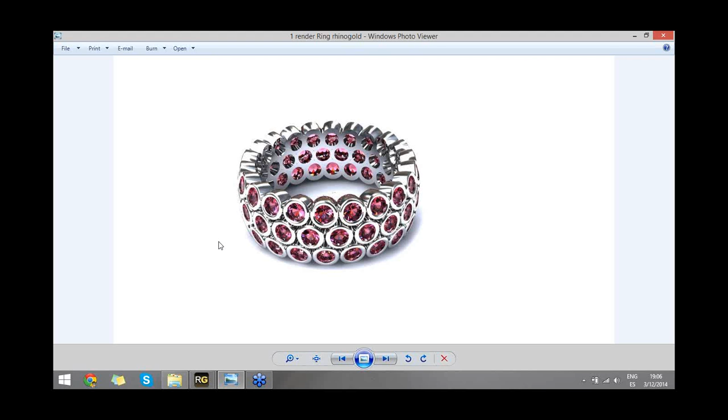Thank you. First of all, I want to thank you, Kevin, Barbara, and all the Novedge team for letting us show RhinoGold. In the next 40 minutes, we are going to show you four real jewelry design models. We are going to start with this ring, a simple ring, using some jewelry studio tools from RhinoGold. Then we are going to create this bracelet using Clayoo. After that, we are going to create this NFL pendant using RhinoEmboss. And finally, we are going to create this signet ring with a pavé setting.

So let's start. Remember, any question, please use the chat and my workmates will be answering. Let's start with the ring.

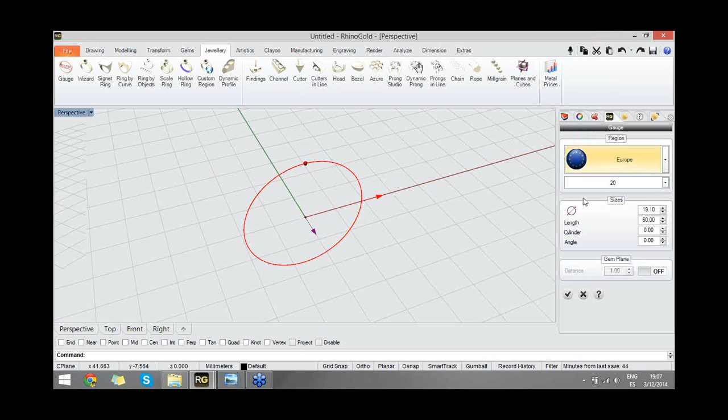The first step, every time we create a ring, I recommend defining the ring size. To do it, under the Jewelry tab, we have the Gauge tool. When we click on the Gauge tool, this tool allows us to create the ring size. We can define any ring size chart in this side panel, and then the ring size. After that, we just need to check, and we have a curve with the defined ring size.

So the next step, I want to create a gem.

To do it, I'm going to the Gems tab, and in here I have the Gem Studio tool, which will open automatically this side panel where I can define all the parameters for this gem. We can define the cut. We have all the standard cuts. I'm going to choose the Brilliant Gem Cut, and of course we can define all the materials available for gems.

Then we just need to define the parameters. In this case, I want a gem with 2 mm diameter, and okay, I just need to check, and as you can see, I have the gem in here, and now I'm going to create a bezel.

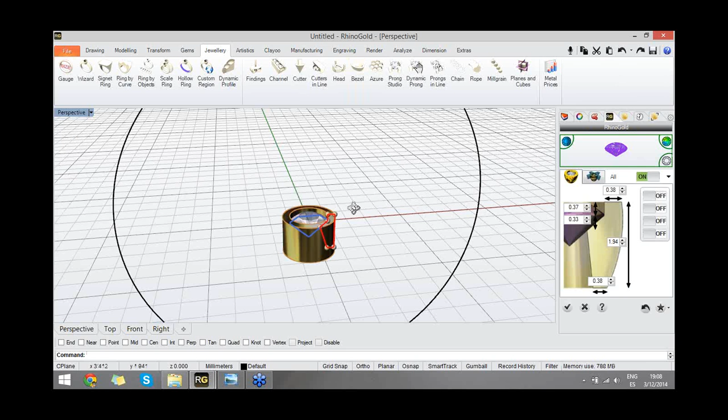So I'm going back to the Jewelry tab, and with the Bezel tool, as you can see, when I click on the icon, it automatically adjusts the bezel to the selected gem. So as you can see now, I can adjust with these points to define the shape of the bezel.

Of course, we can also change to the front view, and in here probably it will be easier to define the shape, so I can move these points to define the shape of the bezel. As you can see, easily we can adjust every detail.

Of course, remember, we can check all the measures, all the parameters in the side panel. So in here we can define more parameters. For instance, if I want to add more points, for instance add one arc in this area, another arc in this area, easily we can define all the parameters.

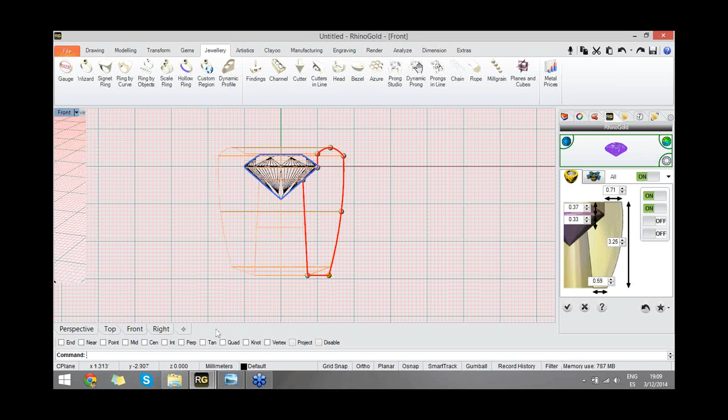So back to the front view, I'm going to adjust a little bit more here, and okay, now we have the bezel created. After this, I just need to check in the side panel, and the bezel is automatically added to the document.

I'm going to save the document. I usually always save the files. So I'm going to replace, and now I'm going to move the bezel and the gem to the top of the ring size curve.

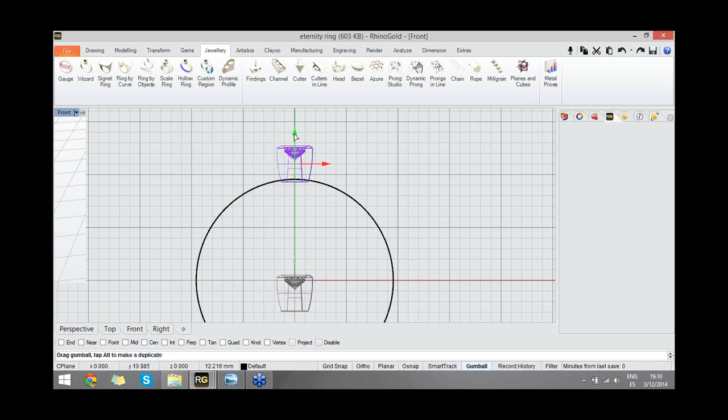So I'm going to activate the gumball. As you can see in here, we can activate the gumball, and with the selected objects, we just need to place them where we need. In this case, I'm going to leave a little bit inside of the curve and the rest outside.

And now I'm going to the Transform tab, and I'm going to use the Dynamic Polar Array tool. When I click on this icon, the parameters appear in this side panel, and I can select first the object. So I want to select the bezel and the gem, and now I just need to define all the parameters.

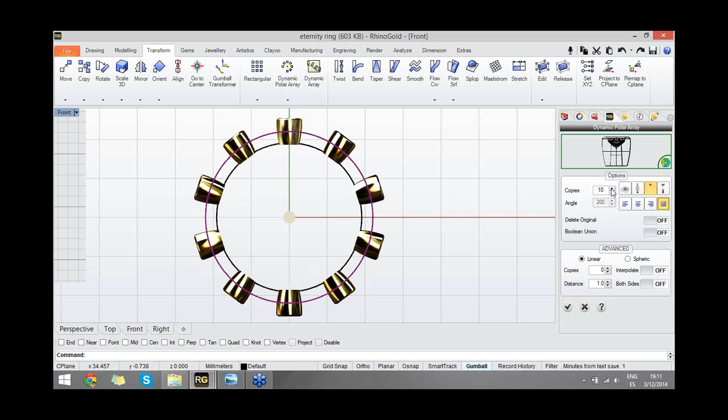So I want, in the front view, to justify all 360 degrees, and now I just need to adjust the number of copies. In this case, I'm going to use 23. Let's go back to the perspective to see what we have, and I'm going to use also the advanced parameters.

So this allows me to create one more copy. As you can see, I have the copy, and of course I can adjust the distance, but in this case I don't want a linear copy, I want a spheric copy.

As you can see now, there's an angle between the two rows of gems, and I can also activate the interpolate option, which will give me interpolated positions. Okay, I can adjust the distance a little bit more, and I will also activate the option both sides. So easily we have the dynamic polar array done, so I just need to check here, and almost ready.

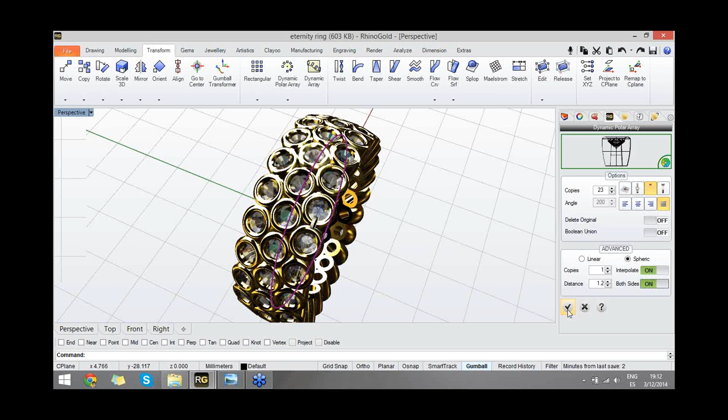So now the last step, I'm going to unite all the bezels we have. I'm going to use the middle mouse button to select all the bezels. This is the icon. And I'm going to use the Boolean union under the modeling tab to unite all the bezels in a single object.

So select the bezels, Boolean union, to unite all these objects in a single one. At this moment, RhinoGold is calculating the operation.

Okay, so now we have one single object, and the final step, I'm going to adjust. As you can see in the front view, if I select the curve, I have the bezels inside of the ring size. So the last step is just to adjust the ring to the ring size.

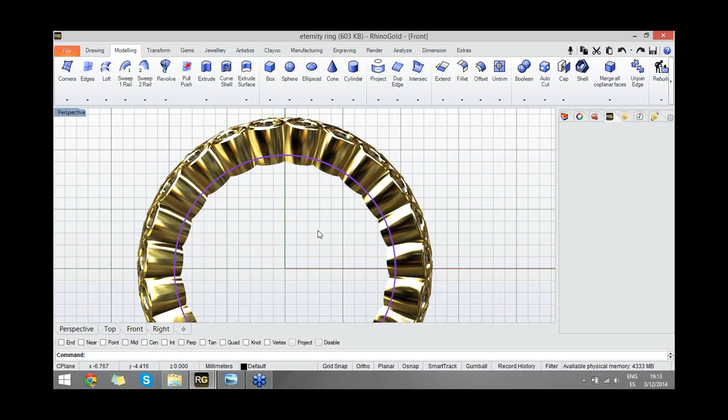To do it, I'm going to use the AutoCut tool. So this tool is very easy. I just need to select the curve to cut and then the object to cut. In this case it's the ring. Press enter, and it starts calculating the cut.

So as you can see, now I'm going to the front view. As you can see, now the ring is respecting the ring size, and easily we have the ring defined.

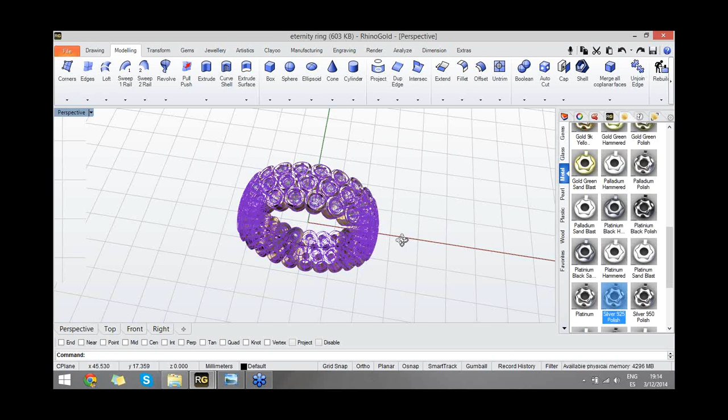Remember, you can always change the materials. If you want, you just select and go to the materials tab, and you define any material you want, and easily we can apply the material. Okay, this is the first model.

Really easy, really simple. Now let's go to the second one. Let's create this bracelet using Clayoo. So I'm going to open a new file, and in this model I'm going to start with Clayoo.

So we have the Clayoo tab, and the first thing is to turn on Clayoo with this icon. As you can see, when Clayoo is turned on, we can see the viewport toolbar in here. This toolbar allows us to use the Clayoo gumballs and also the selection modes. And to start this bracelet, I'm going to create an ellipsoid.

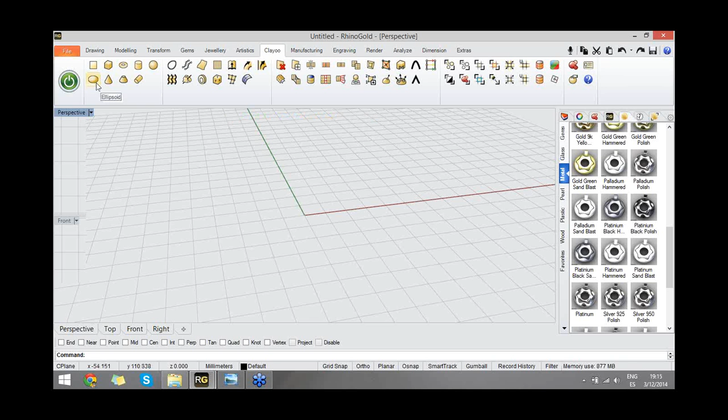So I click on the ellipsoid icon, and once again I have the ellipsoid and also the parameters in the side panel. So we can change the measures in here, or double click in the gumball and define the measures we want. So in this case I want 20 millimeters. In this I will double click again, 10 millimeters, and in this one I want 4 millimeters.

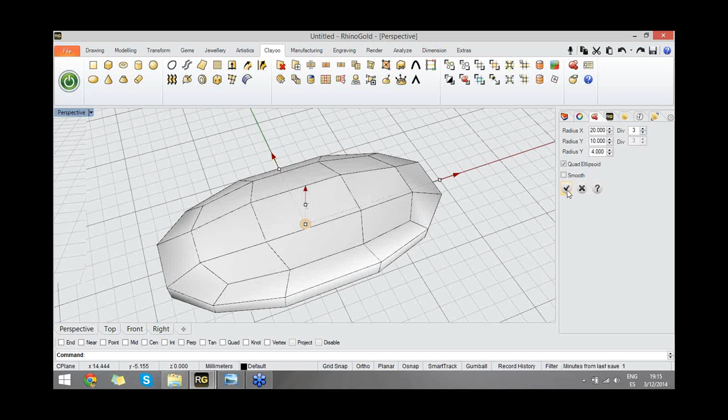Okay. Also, we can define in the parameters the divisions. So I recommend to use always the least possible, and if we need more detail, we will later add more divisions. So in this case, I create just 3 divisions and check here to add the ellipsoid to the document. And now, in the selection mode, I'm going to change to faces selection mode.

And now I can select faces, and I'm going to select this face and exactly the same face in the bottom. So press Shift for multiple selection. I have both faces selected, and I want to create a hole between them. So to do it, with the faces selected, I'm going to use the bridge tool. When I use the bridge tool, automatically I have the hole between the selected faces.

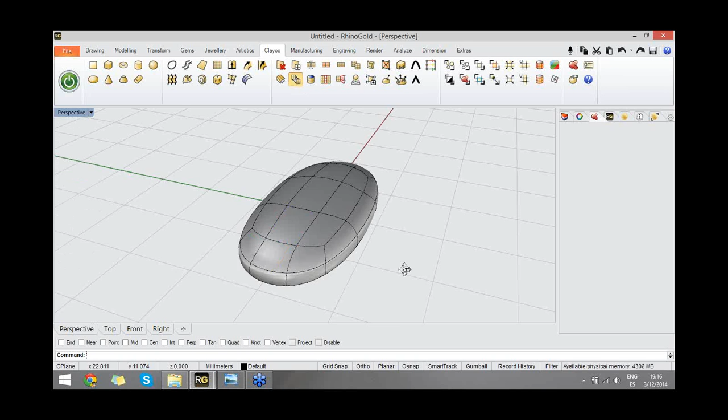So I just need to check in the side panel, and again the same operation for the other side. I select first the 2 faces and then the bridge tool. Okay, so I just need to check, and now I'm going to adjust the shape as I need. To do it, I'm going to select this face and this face. Remember to press Shift for multiple selection.

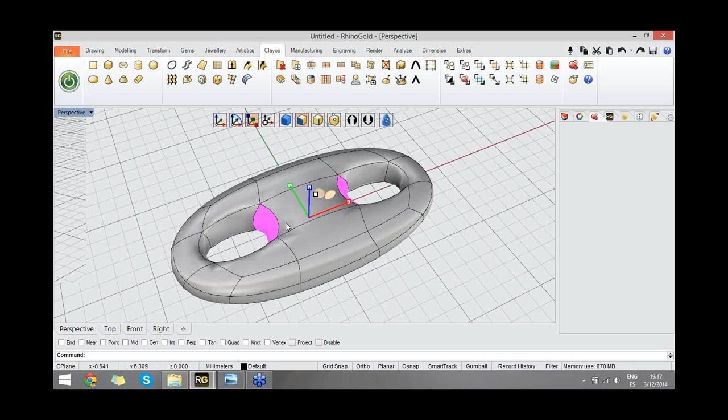And then I'm going to change the gumball to scale gumball. So I can use the scale gumball. In this case, I'm going to use the red axis. So I'm going to use just one dimension scale. As you can see, I can adjust exactly how I need. And now the same for these faces. I'm going to select these two. The same for these two.

And now, once again, I'm going to scale in one direction. This time the green axis for the direction, just adjusting the shape as I need. Okay, probably a little bit less. Okay, and of course we can adjust. In this case, I'm going to adjust this face and this face just a little bit more with the same direction. Okay, and easily, as you can see, we can define the element we need.

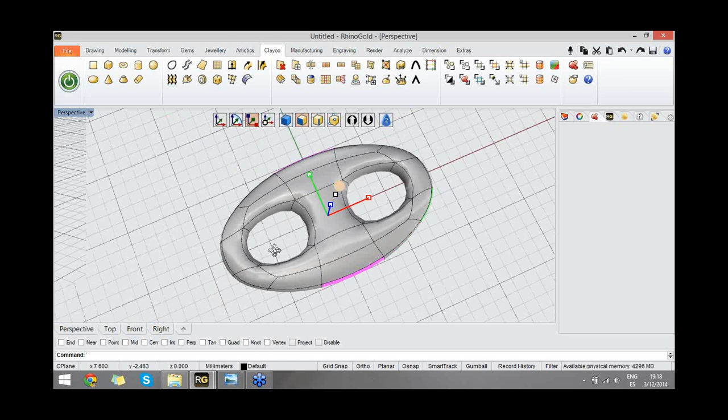Of course, we can go to the front view and adjust if we want, select all of them a little bit less. We can adjust, use the grid as reference to use exactly the measures we need. So in this case, I believe it's fine. So now I have the model, the element for the bracelet defined.

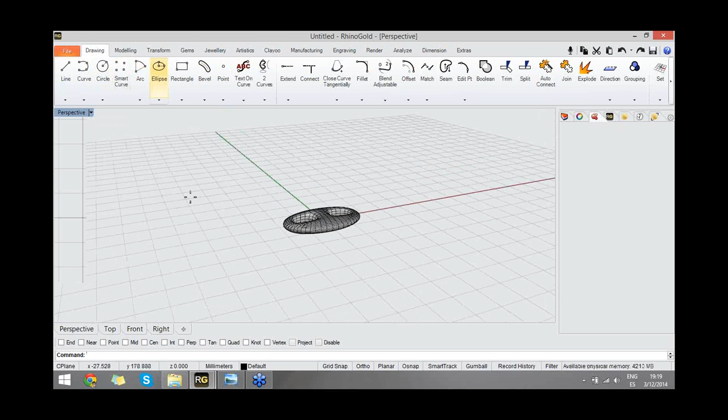I can turn off Clayoo, and now I'm going to define the curve under the drawing tab, the curve for the bracelet. So I'm going to use the ellipse tool, and the first step, I need to define the center. So it will be easier in the front view. I can define the center exactly in the center, and now I'm going to define 22 millimeters for both sides in this direction, and then 33 millimeters in both directions on this side. Okay, as you can see, now I have the curve of the bracelet.

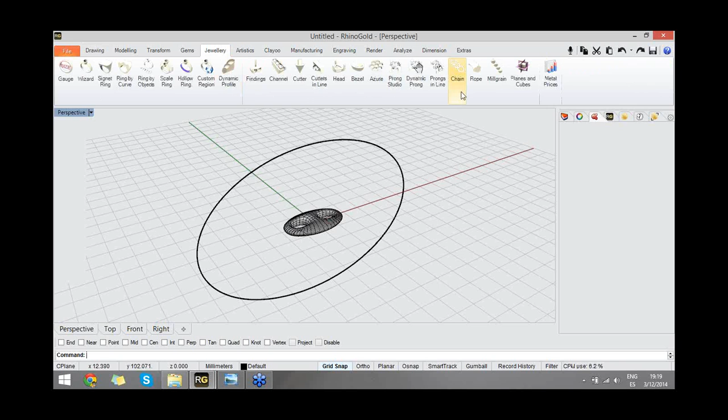I just need to apply the element along the curve. To do it, I'm going to the Jewellery tab, and in here we have the Chain tool. So when I click on this icon, the first step in this side panel, I need to select the object. So in this case, the object is this element, and I need to select the curve. So in this case, this is the curve, and now I just need to adjust the parameters.

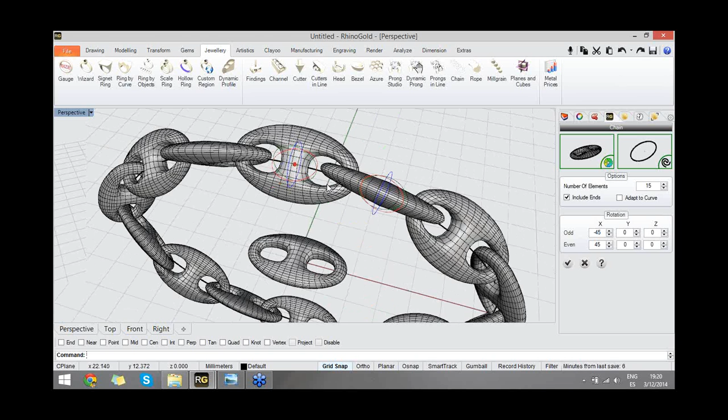So in this case, I'm going to include ends, and the number of copies, I'm going to adjust exactly as I need. As you can see, now we have the bracelet ready. Of course, we can adjust the angle of rotation of each element. As you can see, we can use the gumballs or even the parameters from the side panel. In this case, I believe it's perfect, so I just need to check.

And as you can see, I'm going to change the display mode to render. Okay, and now I'm going to hide this element, select all the elements just to apply a material. So you can see, for instance, 14 karat gold, and as you can see, the bracelet is done. Really, really easy, I believe.

And now let's go to the next model, which will be the NFL pendant, which we will be using RhinoEmboss. So let's take a look.

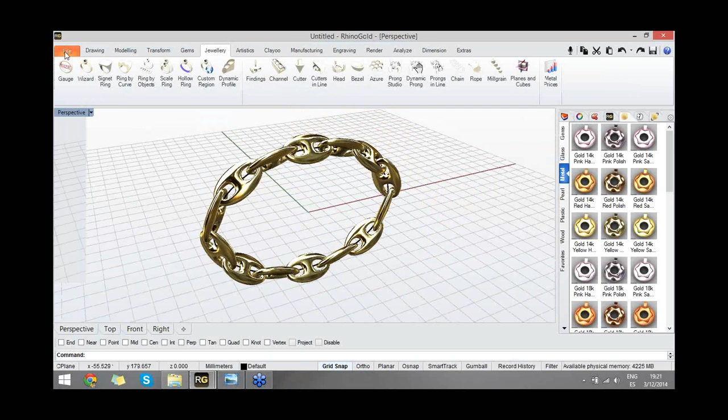First, I'm going to create a new file. So I'm going to save this. And now, to start with this pendant, I'm going to the Artistics tab, and in here I'm going to start with the Raster to Vector tool. So when I click on the icon, this allows me to select an image. So I select the

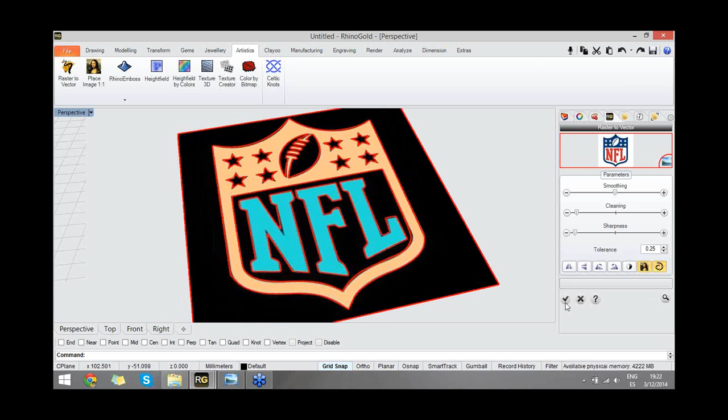NFL image. As you can see, it's not a great contrast image, but let's see what we can get from this image. If we press on preview, as you can see, there is not enough contrast in the image, but we can adjust all the parameters. So let's try to use the invert colors. So now we have more contrast, and with the preview, automatically I have all the curves from the image. So after this, I just need to check, and now I have all the curves I need.

The curves are a group by default, and if I want to ungroup them, it's very easy. Under the Drawing tab, we have the Group icon, and in the submenu, we have the Ungroup tool. So when I click Ungroup, now I can select the curves I don't need, delete, and in this case, I'm going to adjust the scale of the model.

To do it, I select the curves, and I'm going to the Transform tab, where under the Scale 3D submenu, we have the Scale by Dimension tool. So this tool allows me to adjust the exact dimension I need. So I'm going to keep the aspect turned on to keep the proportions of the curve, and now I just need to define the measures.

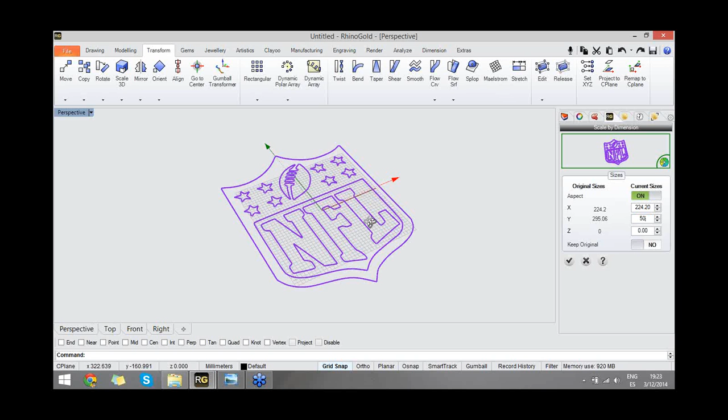So I know I want a 5 centimeters pendant, so I'm going to 50 millimeters, and as you can see, now I have the curve exactly the scale I need, so I can delete the original one and check here to make the changes. So as you can see, now I have my curves ready, almost. Probably they are not centered, so I can easily use the Go to Center tool just to center the curves.

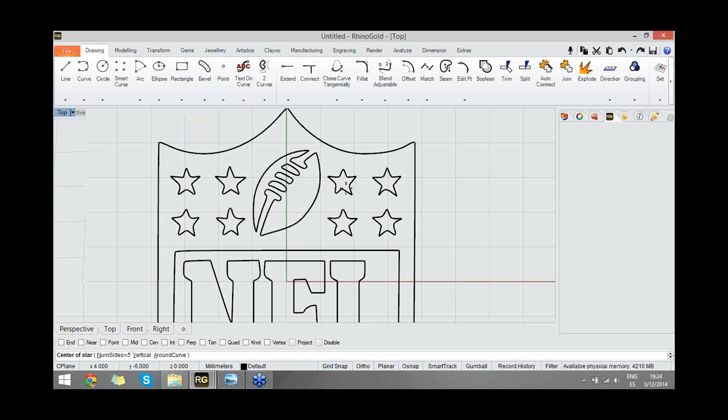And if needed, if the stars are not really as we want, we can go to the top view, and under the Drawing tab, we have the Polygon Star tool. So we can just define the number of sides, so we can easily create a star just to adjust these curves. So we can adjust to create the perfect one, delete the other, and of course under the Transform tab we can copy this to the other positions.

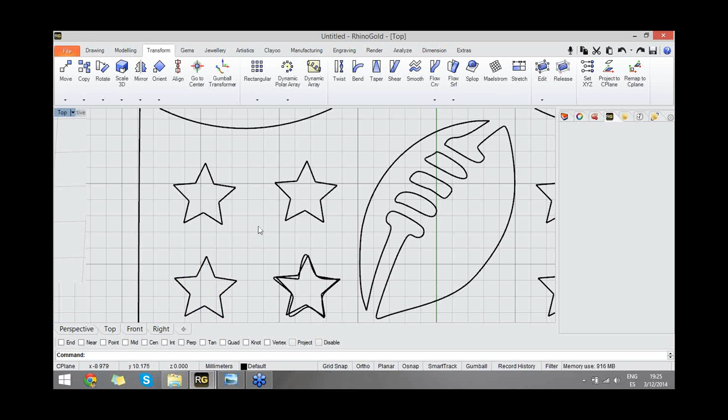So just to make sure I'm using the perfect dimensions. Okay, so the same on this side. Of course, I could create just one side and then create the symmetry, but no problem. Now I'm going to delete the old ones. Okay. And now we have all the curves prepared.

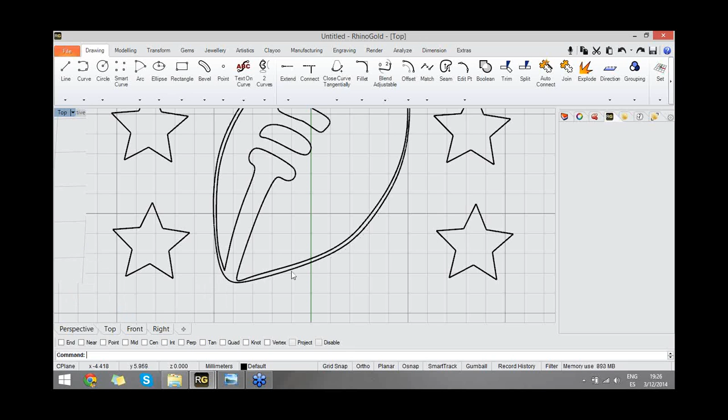One last thing is in here, I think I'm going to need one more curve, so I'm going to create it under the Drawing tab. We have the Smart Curve tool, and we can just create an outside curve just to define one more relief in Rhino Emboss. So I'm just defining all these curves to use with Rhino Emboss. So just creating this outside curve. Now I'm just closing the curve. As you can see, now the curve is ready.

One other thing I can do before starting with Rhino Emboss is group some curves just to be easier to select. So I can select all the stars and group them, very easy with the grouping tool. The same with the letters. I'm going to select them and group. And the same with these curves from the ball. So select the curves and group the curves. So I'm going to save my file, replace. Okay. And now I can start with Rhino Emboss.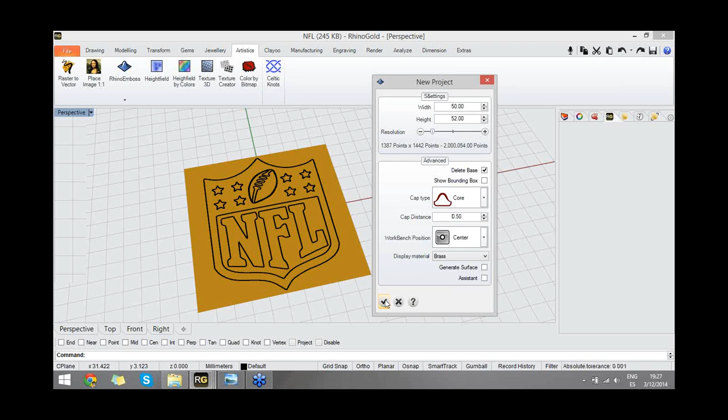And the cap distance can be 1 millimeter, or let's choose 0.5. So all the parameters, all the settings are defined. We just check here, and automatically Rhino Emboss will appear in the side panel. So let's take a look how to use it.

The first thing is to add a new operation. So I click on this icon, and as you can see, I have the first operation. So I need to select the operation type. When I click on this icon, I have several operations available. In this case, I'm going to choose the first one, operation by profile, and after defining the operation type, I need to define the curve to create this operation. So I click on this icon, and I just need to select the curve I want to apply.

So after this, automatically a gimbal will appear where we can adjust exactly how we need. So we can adjust the shape, remember this for two directions, and with double click we can adjust exactly the measures we need. So we adjust the gimbal, and now we just need to refresh the results, and as you can see, the gimbal was successfully applied to the curve. So now we have one operation. Let's move forward to the second one.

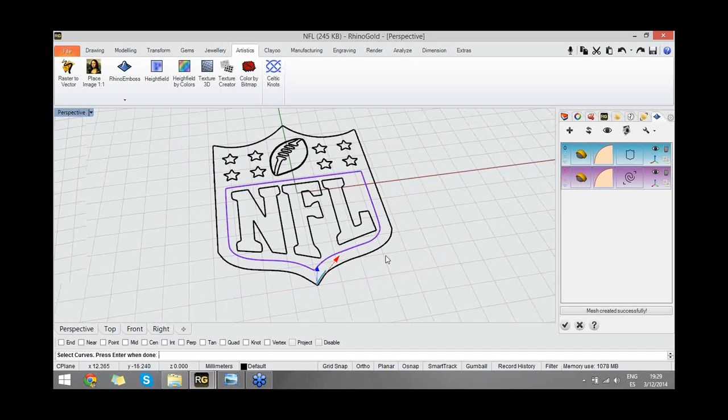So we just need to show again the results and refresh to check. So as you can see, it was successfully created. One was added to the previous one. So I'm going to move forward to the next operation. Also, one important thing is that the gimbals we used before, we can hide them in this icon. So we go to the operation and hide the gimbal, so we can show it any moment. So I'm going to hide, I won't need them.

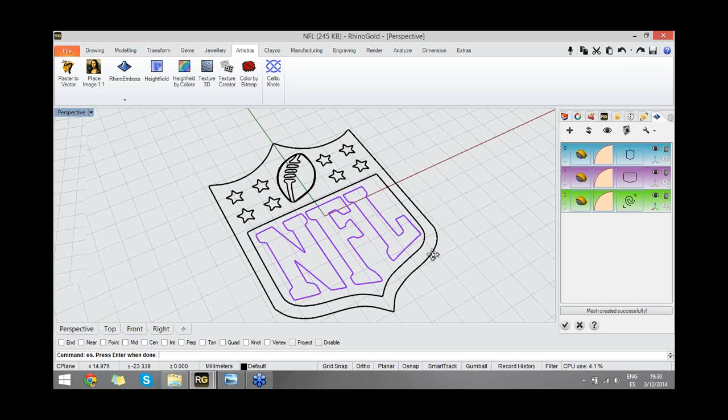So the next step will be to add another operation. So click on this icon. Once again, operation type is operation by profile. And now the curves, I'm going to select the letters. So after selecting the letters, the same process, I just need to adjust the gimbal exactly how I need. So I can adjust, double click and define exactly the measures I need and adjust the gimbal. Of course, we have a few more options.

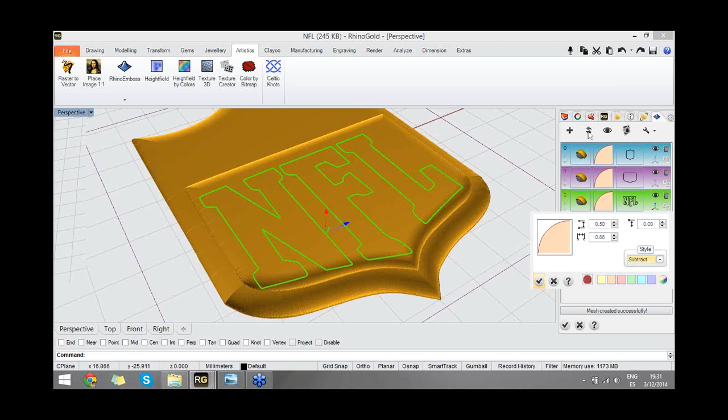If we click on this icon, the profile parameters will appear. In this case, I don't want the letters to be added to the previous profile, so I'm going to define not add, but subtract. So now, when I apply this relief, instead of add, it will subtract. We just need to refresh, and as you can see, easily we have the results.

So once again, the same process, one other operation, select the curves. In this case, I'm going to select the stars, press enter. Now I'm going to hide the result just to show you. In this example, I will change the profile. It's not the best profile to create the stars, and to do it, it's very easy. We just go to Operation Settings, and in the profile, we can click on the profile, and as you can see, we can select any of these profiles available. Of course, we can create our own, but in this case, I want this straight profile.

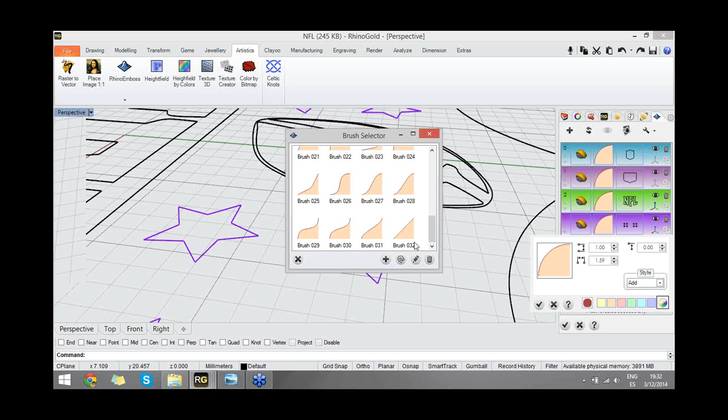So the same process, I apply the profile, adjust the gimbal, and now I just need to show the results and refresh. So as you can see, easily we have the stars created. Just change the profile, and here they are.

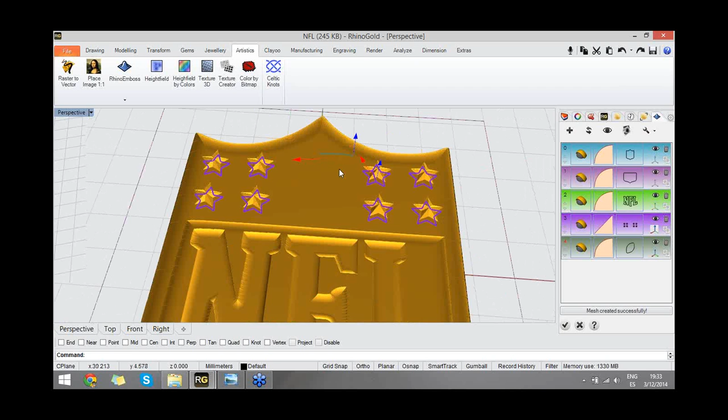So once again, I'm going to add one more operation, type by profile, and the curve. Now I'm going to choose this outside curve I've created. So I just need to adjust the gimbal. So I'm going to hide the previous ones, adjust this one, double click, I will define 0.5 millimeters, and now the same process, I just need to refresh to check the results.

Okay, so now the idea is to add another operation with another curve. So I select the curve in here. In this case it will be the group of curves. I'm going just to adjust the gimbal exactly how I need.

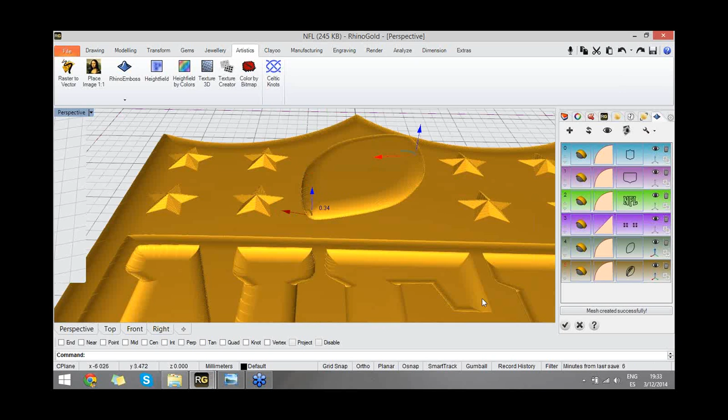Okay, double click. We can set 0.5 millimeters, probably a little bit less. And now refresh to check the results. Okay, as you can see, it was successfully created. Of course, we can at any moment adjust the gimbal and refresh the results, but now I believe it's fine.

So I'm going to use one last operation type. This time I'm going to select the smooth operation type. To use this, as you can see, I have a small circle, and using this circle I can smooth the results. As you can see, easily we can smooth all the results.

Of course, we can change the parameters in this icon. We can change the diameter. For instance, I need a big circle, so I want a diameter of 12 millimeters, and of course we can change the smooth level. In this case we don't need to, so I'm going to keep 1. And now I just need to apply the smooth to all the pendant, just to smooth the surface. Okay.

As you can see, very easy. I just need to drag the mouse over the area I need. And now I can turn off the smooth tool, and the pendant is ready. All the reliefs were successfully created. Now I just need to check here to add the relief to the document.

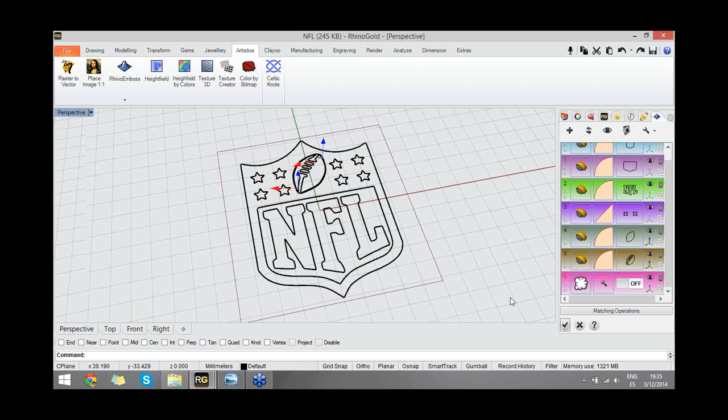And at this moment, RhinoEmboss is calculating the reliefs, and it will apply them in the document. Okay, it's computing the mesh. I'm just going to change the display mode to render. Okay, as you can see, the relief was successfully created. As you see, the cap type I defined is perfect. So let's apply the gold material.

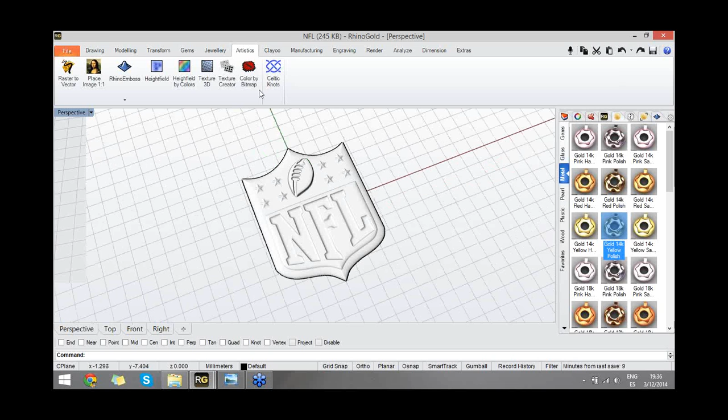And now the last step, I'm going to the Jewelry tab just to apply a finding. So in the findings tool, we can choose any of these findings. We can click on any of these, double click, and automatically it will appear in the document. In this case, just select, and with the gumball I can place it exactly where I need.

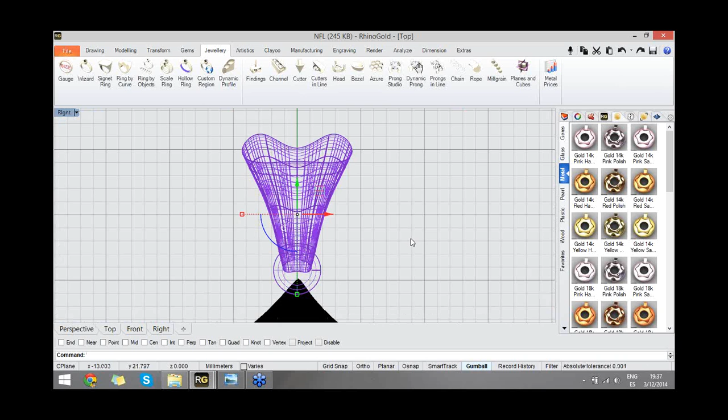So probably in the top view, I can adjust exactly the position, as you can see. And in the right view, it's perfect. So easily we have the NFL pendant. As you can see, it's ready. Okay, this is the third model.

Let's move forward to the next one, and the next one will be this signet ring. So let's start the signet ring. I will open a new file. Okay, I want to save the changes, and to create a signet ring we can do it easily with the signet ring tool under the Jewelry tab. When we click on the icon, automatically we have the parameters in the side panel. Let me just change the display mode to render, and as you can see we can define all the parameters.

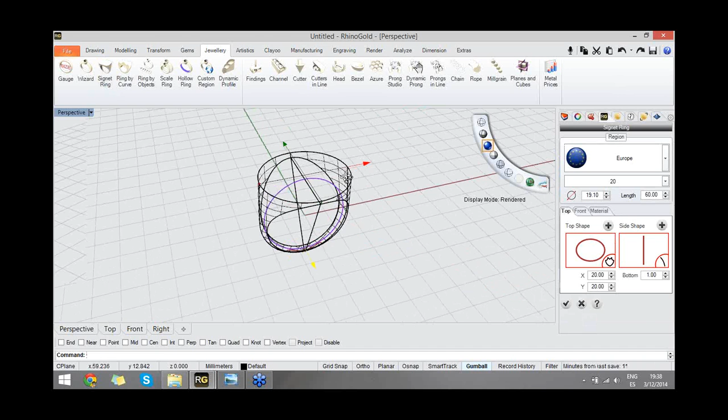I'm going to start by defining another curve, so I want to use this curve. Of course we can select our own curve, we can add customized curves. In this case that's not needed, but all the other parameters I'm going to adjust, for instance, this one I want 4 millimeters. Remember, we can double click to define the measures, and then I'm going to the front view. As you can see, the same process. We can apply the changes in the parameters or using the gumballs.

So I'm going to apply a little bit, 8 in here. In here, let's type 2 millimeters, and in the bottom let's use 1.5. Okay, so the ring is defined, of course the ring size, everything. As you can see, now we have a solid ring, so I need to hollow this ring.

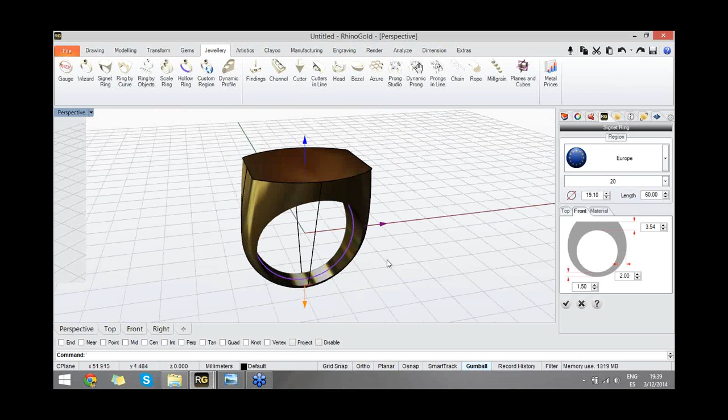To do it, we have the hollow ring tool, and this is very easy. We just need to select the surface we want to hollow. In this case it's the inside surface, and then we just need to define the measures. In this case I want 1 millimeter thickness, so with these point gumballs I can adjust to hollow the red area, the yellow area will be the transition, and then the solid part. So I just need to check. As you can see, easily we have the ring hollowed.

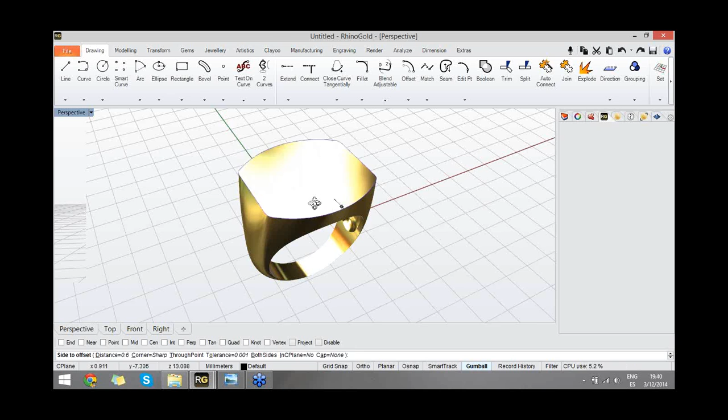So the next step, I'm going to create a section to apply the pavé. To do it, I'm going to create a curve, and this curve I'm going to create with the offset. So I select the outside curve. I want to create another curve inside. So easily we have the inside curve, and now I'm going to the Modeling tab to use the pull push tool. This tool allows us to create a recessed area.

So I select the surface, in this case this one, and the curve, in this case this one. As you can see, automatically I have a recessed area. I just need to define the distance. In this case I define 0.4 millimeters, and as you can see, now I have the section for the pavé.

So to apply the pavé, I'm going to the Gems tab, and in here I'm going to use the pavé automatic tool. I just need to define the parameters, select the area where I want to apply the pavé, this surface, then we just need to define the gem size.

Of course we can define multiple gem sizes or a range between sizes. In this case I'm going to use gems between 1.8 and 1.4, and the distance between sizes 0.1 millimeters. So when I click on preview, I can start the pavé on any point, or I can use this option to start from the center. As you can see, the tool is calculating all the positions.

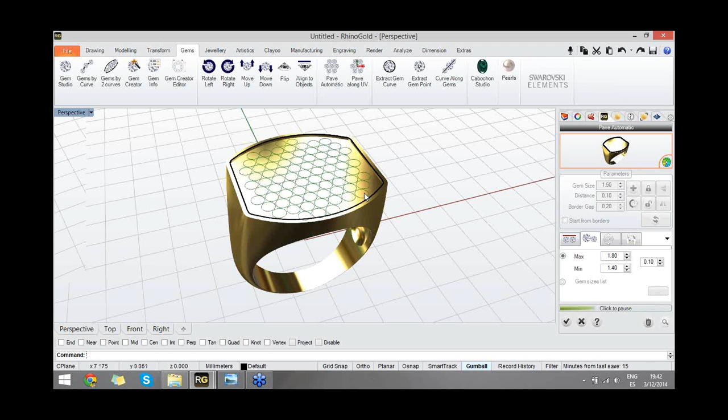At any moment we can pause the calculation just to adjust the positions. So let's take a look at the results; if we need to adjust anything, we can do it. So at this point, the tool is calculating all the positions. It's trying to add the gems with the parameters we defined.

As you can see. And of course, if we need to adjust, for instance, I want this gem with 2 millimeters. I select the gem with the plus key. I just adjust the dimension. So easily we can adjust all the parameters. For instance, I want to add one more gem with 1.4. Easily we can just add the gem here, here, so no problem at all.

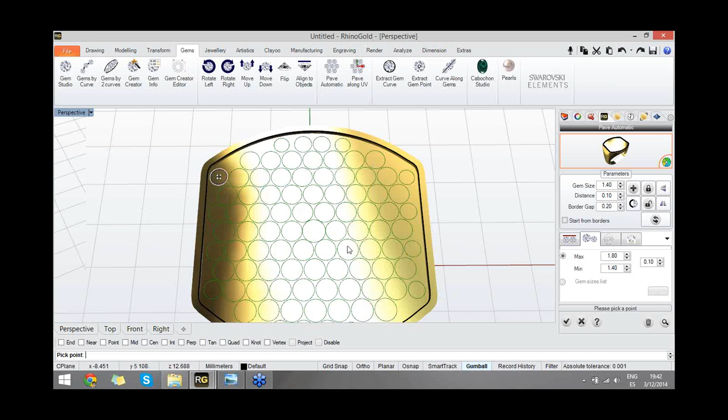So we just need to define where we need, and in the end we just refresh the positions. As you can see, it's refreshing to keep the distance between gems and the distance to border to respect all the parameters we defined. Finally, we have the gems position, we need to define the prongs to apply on these gems.

To do it, we have the prongs tab, and we just need to turn on the prongs. As you can see, automatically we have the inside prongs. So I'm going to adjust the parameters, I'm going to adjust diameter, height, everything I need. And finally, I just need to apply the outside prongs. To do it, probably it's easier in the top view.

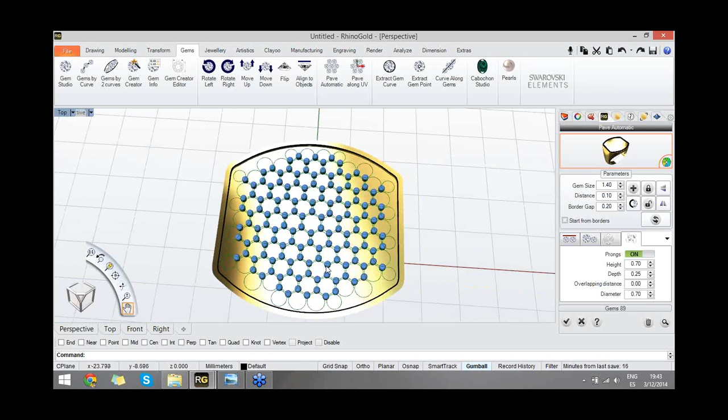I change the display mode, and I just need to add more prongs. So it's very easy. Just under the plus icon, we just add the prongs we need. So in this case, just apply the outside prongs. Okay, easily we can do it. Just define the position and click on it, as you can see, and the inside ones are placed automatically. So we just need to apply these outside ones, as you can see. Really easy.

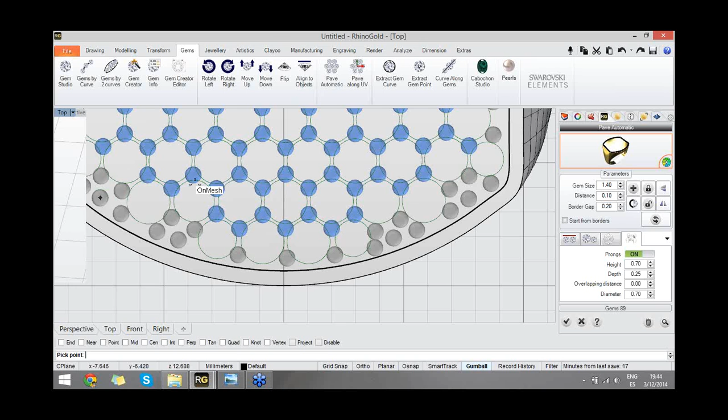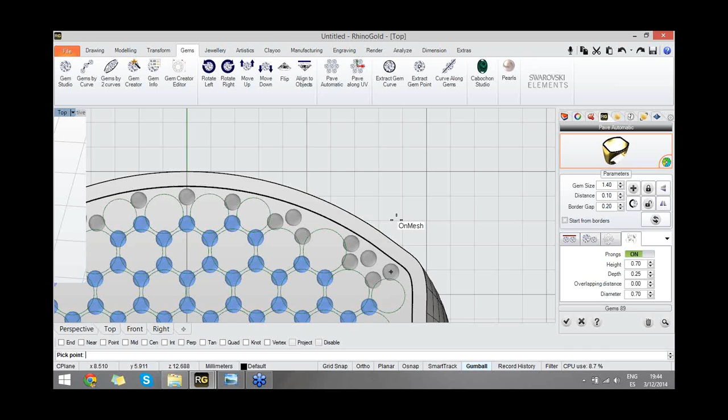Find the position, click, we can define all the prongs we need. Okay. Okay. Almost. And as you can see, I'm going back to the perspective. As you can see, we have everything defined. We just need to check here. And as you can see, the gems and the prongs were automatically added to the ring.

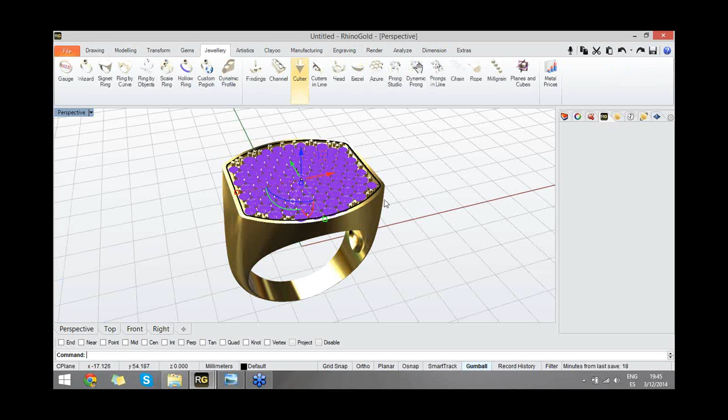Now, the last step is just to create the holes for the gems. So I just need to middle mouse button and select the gems. And now I'm just going to create the cutters for the gems. So create the cutters. As you can see, we have the cutters automatically. So I can adjust some parameters. For instance, we don't need so much in the bottom. We can easily adjust. And after this, check here.

And as you can see, now I just need to make the Boolean operation. So first I'm going to remove the cutters from the ring in order to create the holes for the gems. So first object is the ring, and the object to remove is the cutters. So at this point it's calculating all the operation. Okay, I probably didn't use the delete option inside the tool parameters, and finally we just need to create the Boolean to join the prongs to the ring.

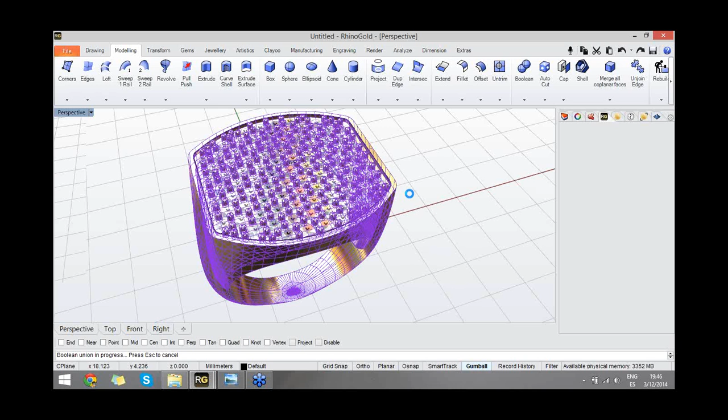Okay, as you can see, this is the idea. Just going to hide. Really, really easy. Okay, so as we have seen before, we can apply any material for these objects, and we have the ring ready. Okay.

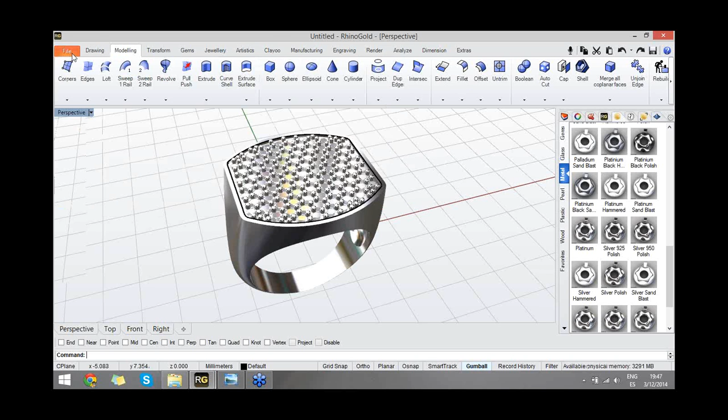So I hope you have some questions. We have time to check some questions, but probably I will just show you one quick example of the report tool with this model. Let me just select, under the menu file, we have the report tool. So this tool allows us to create a report from all the objects in the document.

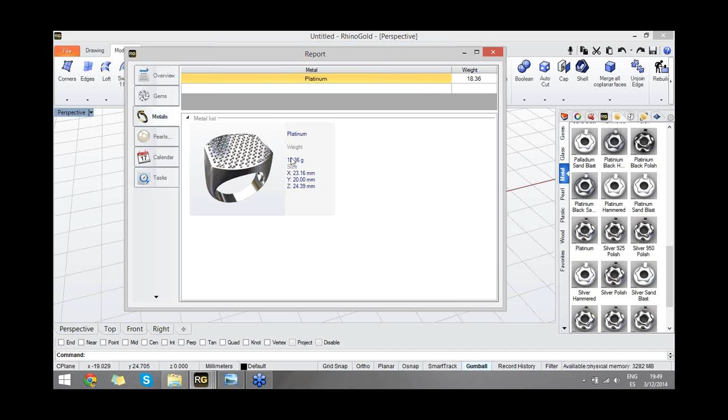Actually the same with the ring. We have the weight, we have the material. Of course, if we want to know the weight in gold, we just need to change it for yellow gold. And as you can see, we can get all the information in the report to use as reference. We can print, we can save this file. This is the idea.

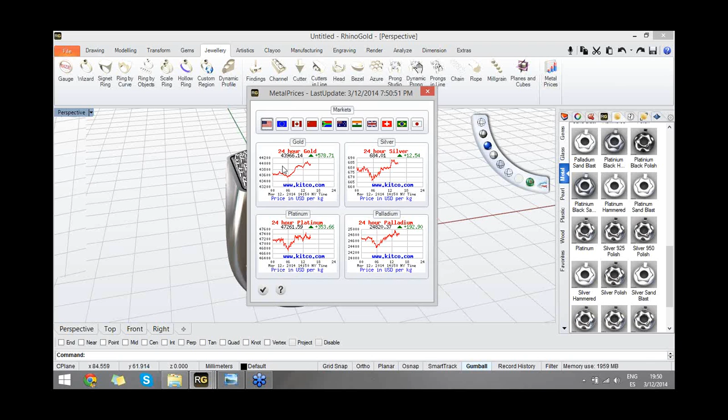I think you answered this question with the report, but yeah, I think we also can show this tool, probably it's very good to see as well. With this tool, the metal prices, we can check exactly the price of the gold, the silver, platinum, and palladium. So as you can see, we can select in this case European Union and automatically update, so we have all the costs from the metal in here. So it's really easy to get the metal prices.

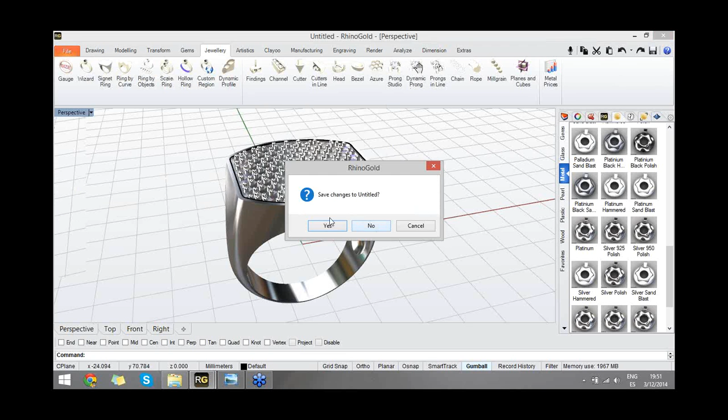Okay. Other question is how complicated is it to create a model to send to a 3D printer, what do we need? Imagine that you create any design and you want to send it to print to your 3D printer. Actually it's really easy. After we create any model, as you can see, we have created this ring, and now we want to send the ring to print. So we need to...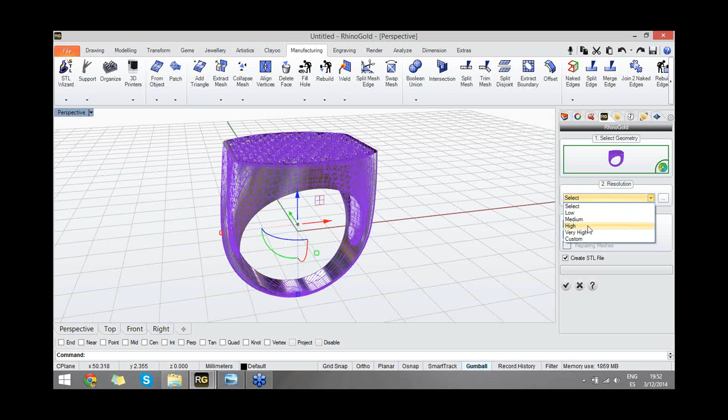...convert this model into the STL file format. STL file format is the standard file format for all 3D printers. So we just need to select the model, then we have the manufacturing tab, and in here we have one option, the STL wizard tool. So we select the object, and then we just need to select the resolution. In this case we don't need very high, we just select high resolution, and automatically it will export the object to STL. As you can see, we have the mesh in here.

So now let me just check. Okay, I think the important thing is it detects some problems, because the STL file must be a closed mesh, right? Yes.

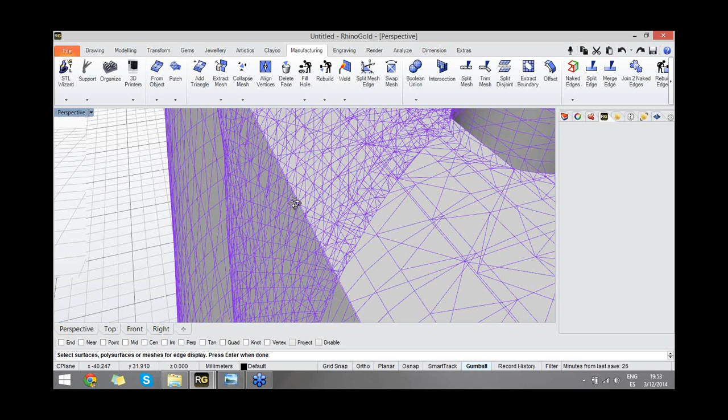Yes, we have several tools to check this, all the options we need. So in some cases, if the STL is not closed, we can fill the holes from the object, or we can even analyze the object if there are some naked edges or any detail. As you can see in here, we can easily fix these issues. In this case, I know this is the naked edge, so to fix this, I can just fill the holes or delete the faces I don't need. In this case, probably easier in this display mode.

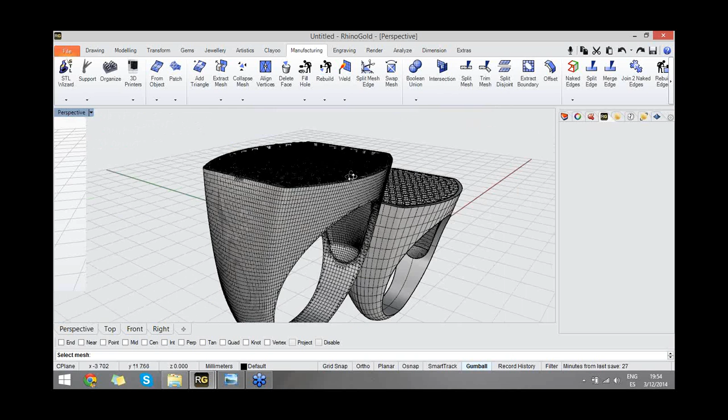Okay, can delete, and easily we can fill the hole. So I just need to select the mesh, and as you can see, this is the idea. The STL file format is a mesh, as you can see, it's this mesh. We can define more or less resolution. I believe this is enough for this ring.

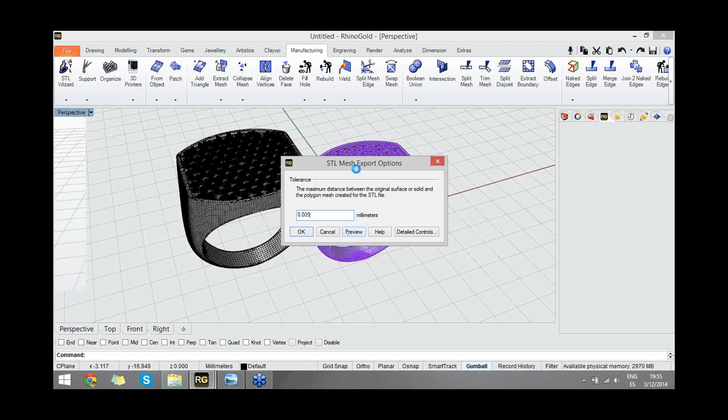So the standard process is this, or even we can export directly by selecting the ring, and under the menu file we can easily export, or directly here, or choose the file format in here. STL file format, define the ring name, the folder where we want to save the ring, and define the resolution. I believe we don't need too much resolution, we can preview. So there are several ways to export a model to STL. After this, I just need to export, and now we have our STL file in here. So this is the idea. After this, we just send the file to the printer, which will read our STL file.

Okay, great Pedro, yes? Sorry to ask too many questions, because we are receiving a lot of questions. One of them is, because you told before that the STL file, I can send it to any printer?

Well, usually the standard file format is STL. So okay, then I don't need to worry about what machine I'm sending to create the STL, right? That's it, that's it. The standard file is STL, so it's just the STL which is important, it doesn't matter the machine. So all the machines will recognize the STL file format.

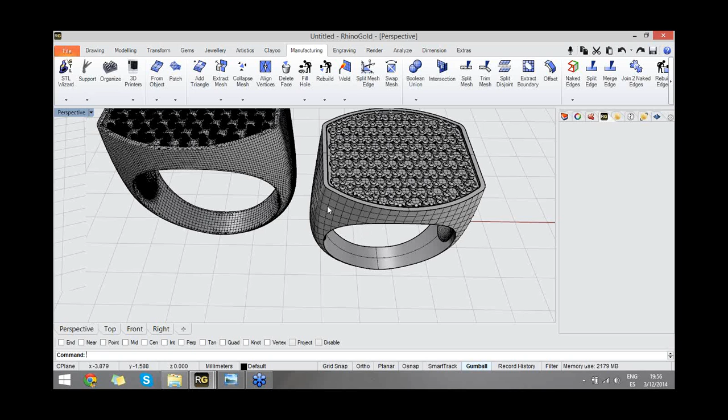Okay, other question about RhinoEmboss, because by default I think RhinoEmboss creates meshes, okay? Yes, but we also have the option, when we define the emboss project, to generate the surface. So if we activate this option in the project settings, it will generate a surface instead of a mesh. When we generate a surface it will be a NURBS object, and we have the option to generate a mesh or a surface — it depends on the workflow we want. In this case it's very easy, just activate this option and the rest will be exactly the same process. Okay, okay, just a point here.

RhinoEmboss allows the new export to height-field bitmaps, in black and white. I saw that there are a lot of companies using this format with laser engravers. Let me show a quick example.

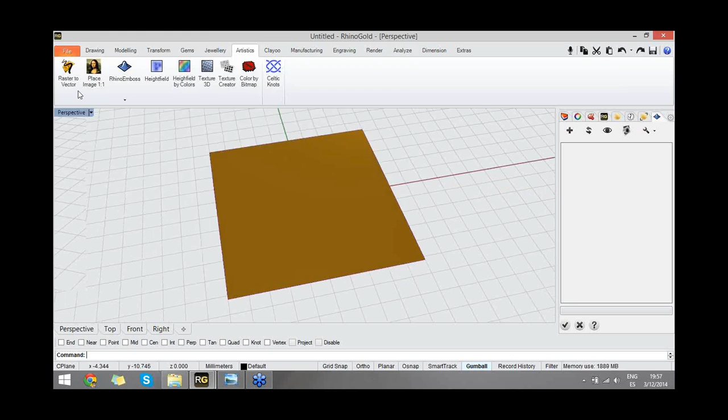So I'm just going to open this file. I believe we didn't save the changes in here, but I can show a quick example of one operation and what's the result of the height-field image.

So I apply the relief I want, then refresh. Now from here I can use this icon. Under the project settings I have the option to save a height-field image. When I save this option, I just need to define the file format and the image, so I save the image and the bitmap was successfully saved.

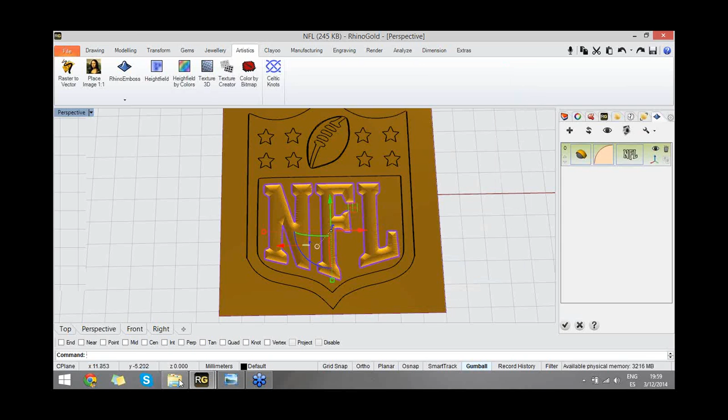As you can see, now we have a grayscale image. If I apply this image on any surface as a texture, it will be exactly the same shape as this one, with the same profile, everything.

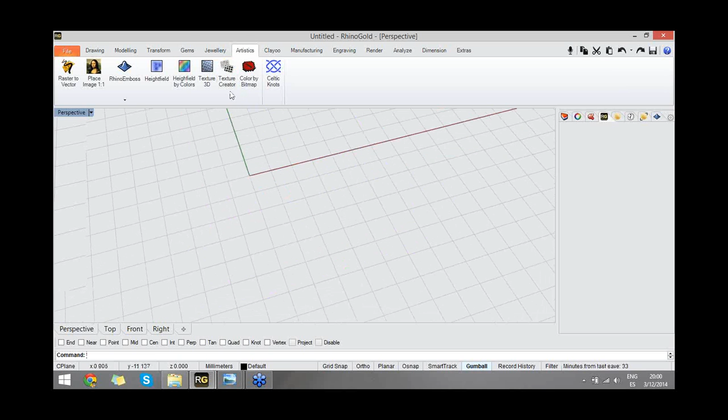So probably I need to add the changes before, let me check. Okay, I just need to save the image in our user folder.

It's very easy, so I just go to the user folder, open it, and under the textures I can copy the image I have created now. So I copy this image to this folder, and now probably I need to restart just to have the image in here.

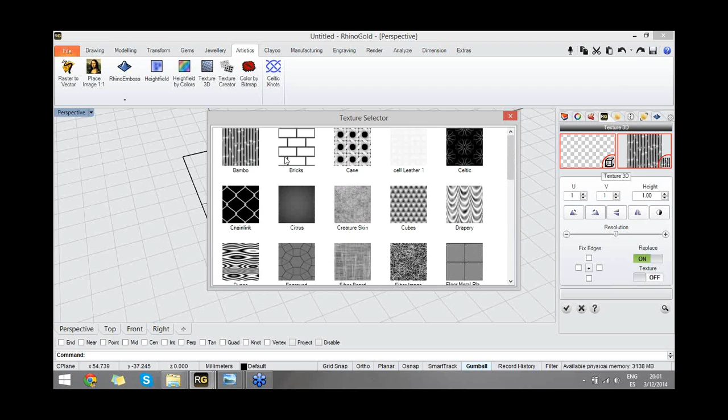Yes, just need to restart, but the idea is this: I apply the image as any other image we have in here. So if I choose this one, I apply it to the surface and define all the parameters, and as you can see, we have a surface based on the image we have created. So this is the height-field image, and we can apply it as a texture. So this is the idea.

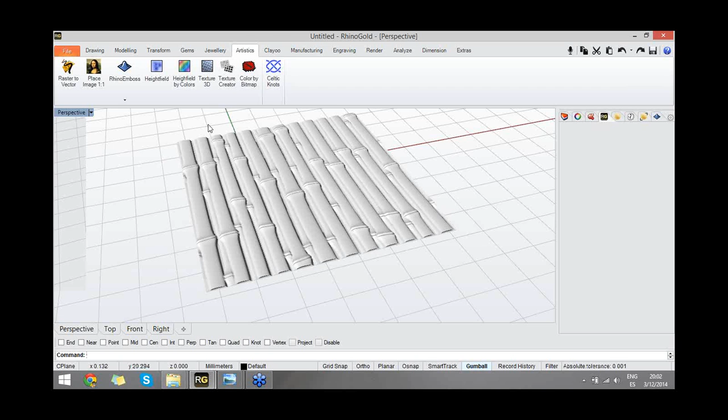Well, actually, I think we have lots of rendering softwares compatible with RhinoGold. So I believe if the user has some experience with a specific rendering program, I would recommend keeping using that same program. But you can use lots of different softwares like Brazil, V-Ray, Flamingo, Penguin, Maxwell, Keyshot. There are lots of different rendering programs available, and all of them are good software.

So we get good results with Brazil. For instance, we have the Render Studio for Brazil, and we have very good results for rendering with it. So I believe Brazil is very good, V-Ray is very good, there are lots of good softwares for rendering, and importantly, all of them are compatible with RhinoGold.

Yeah, from my point of view, Brazil and V-Ray are technically the best render engines for jewelry, and for a lot of other markets. For example, Flamingo is really nice for architectural and other markets, but for stones I cannot obtain the same quality as with Brazil or V-Ray. So probably, from my point of view, Brazil or V-Ray are the two top renders. Also Keyshot can create some beautiful renders, and RC Live of course.

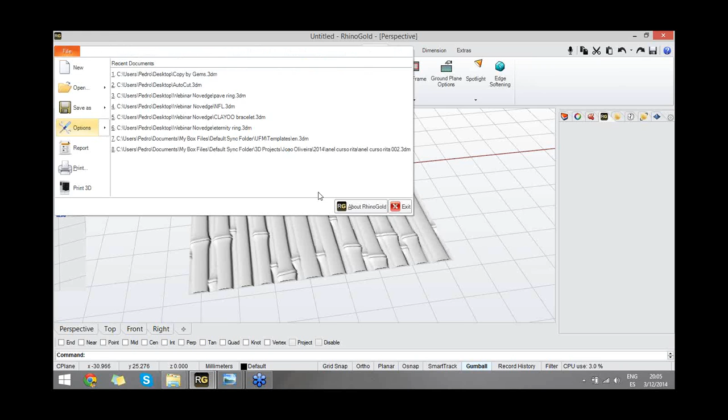All right, so what was that? Go ahead. Go for it. Last question, last question.

Can we set the weight in pennyweights? Yes, very easy. Under the options, we have the RhinoGold options, and in there we can define the weight as a unit, as grams, or any other weight. So easily we can change to the one we want, click OK, and done. Now the unit is defined. It's really easy.

All right, okay, yeah, because I noticed that one too. I was like, I've never seen that unit of measurement, and I'm sure that's probably a jewelry design thing or a jewelry design term. But really cool.

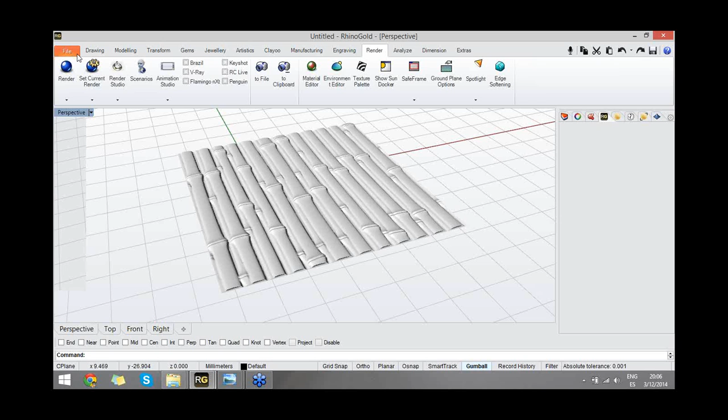Yeah, I think what we'll do, since that's a Q&A and there's tons of questions, is forward them to the TDM Solutions team, and they will hopefully not work on the weekend to get those answers out, and we'll try to have a blog post ready by next week.

How about that? Very good, Kevin. Cool, because I understand you guys, it's like 8 p.m. over there, local time in Spain, or? Yeah, yeah, but there is no issue.

Yeah, cool, all right, so I'll switch back to me. I'll make myself the presenter right about now. Let me know if you guys can see the screen. Very cool, it should be up. Okay, all right, yes, so yes I see.